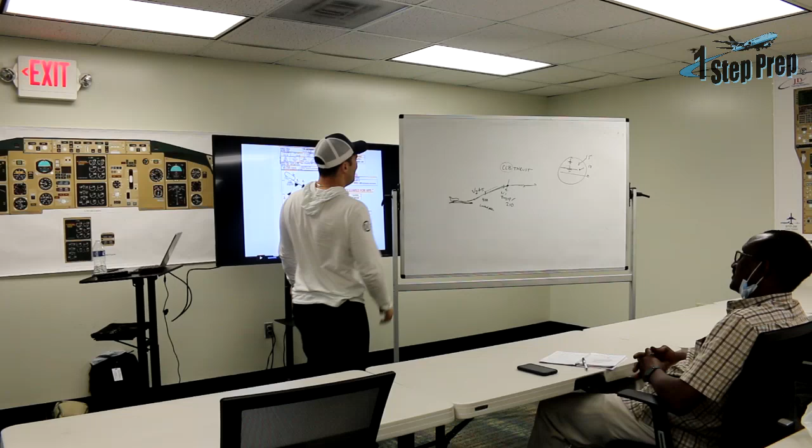Before departures, when you line up, ready for departure, parking brakes released. You move the throttle all the way to the takeoff detent. It has a takeoff detent, so I go to the takeoff detent.

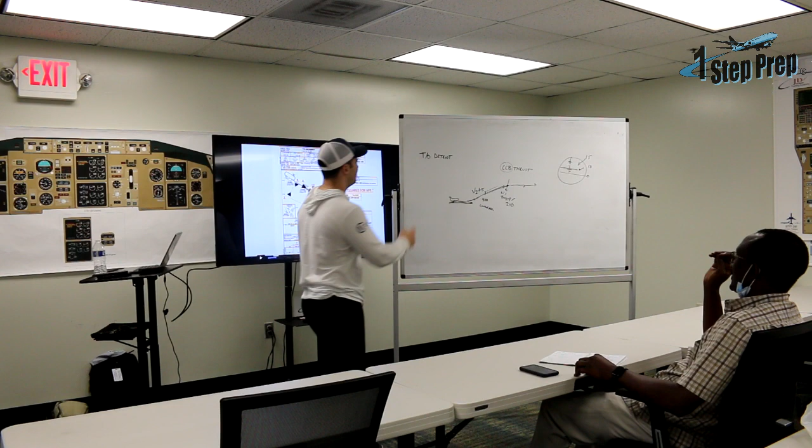And you have the climb detent. I want to list the three of you. Yeah, you can write it. Takeoff, climb, climb detent, and the cruise. All will be annunciated on the PFD. These are thrust settings. That's correct, always annunciated.

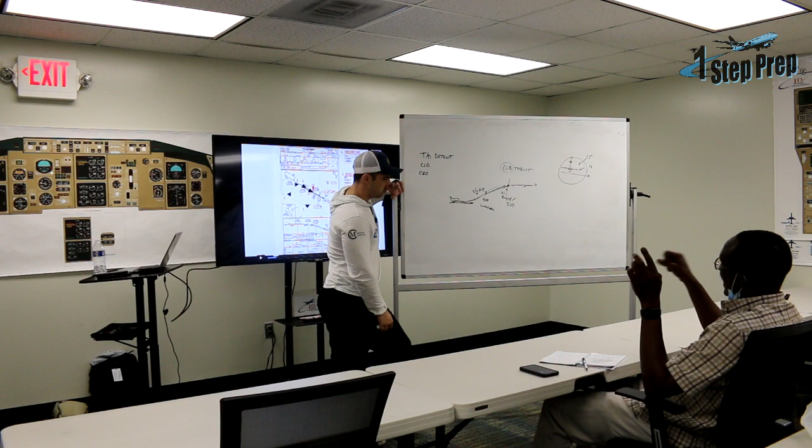So at 400 feet, you select heading or nav or whatever. At 400 feet, you select heading. At 1,000 feet, flight level change and bring back the thrust to climb detent to avoid the 5 minutes.

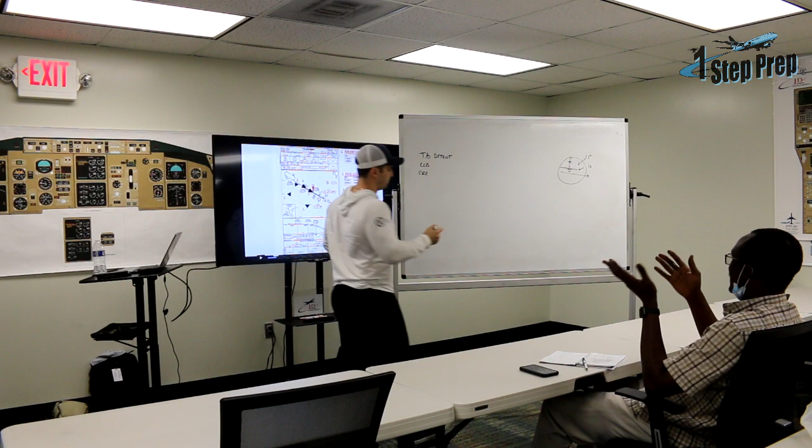So you now return to the climb detent and continue your climb. So the 737 profile is no different. It's the same, same profile. The only difference is here the aircraft selects the climb speed and whatever for you.

The thrust. In the 737, you have to select 210. Yes, so let's look at it, right? Here I am now, here you are, okay? You're on the runway and you're about to take off.

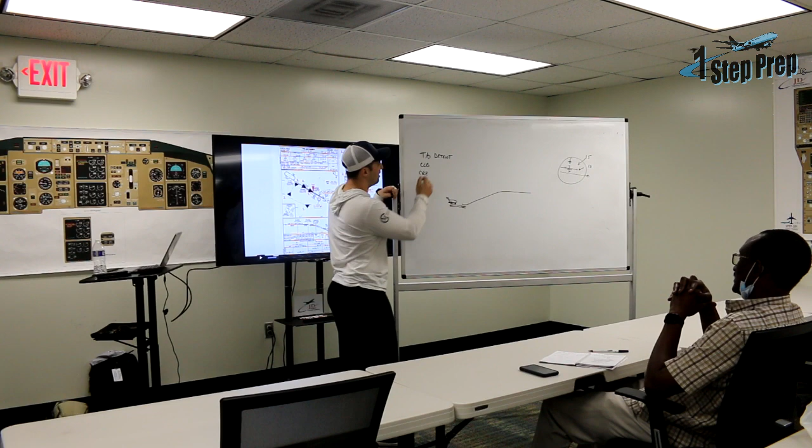So the first thing we do, we advance the thrust levers to 40%, stable, and we select TOGA. Now, TOGA, when you push it, what kind of thrust did I get? Takeoff thrust. Okay, so in the Citation, you went to the takeoff detent to get takeoff thrust.

In the 737, I push TOGA to get takeoff thrust. It's the same thing. It doesn't matter if it's a detent or a button. What's important to you is give me takeoff thrust. Correct? Okay, so we rotate off. V1, rotate, positive rate, gear up.

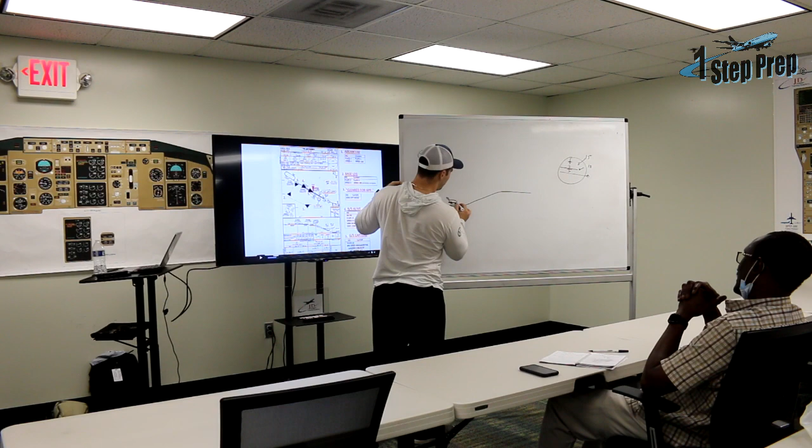You said at 400 feet, what do you guys select? Select heading or the lateral mode. Okay, what do you think we do in the 737 at 400 feet? Same thing, right? 400 feet, heading select. Lateral mode, heading select. Correct, yes, the same thing.

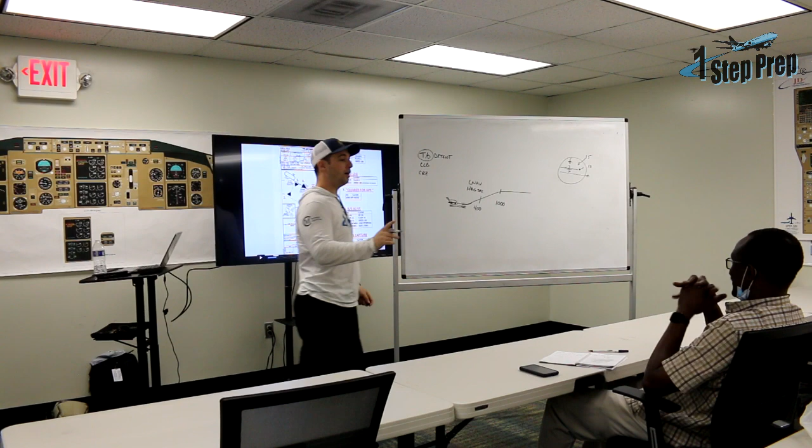Nothing's changed. Okay, let's get to 1,000 feet. Flight level change, okay now, or VNAV. Hang on a second, what did you say you do in the Citation at 1,000 feet? Flight level change, at 1,000 feet.

Yes. Okay, and do you do anything with the thrust levers, or do you leave them alone where they are? At 1,000 feet? No, do you have to reduce? Yeah, you have to reduce because you don't cross 200 knots with your flaps at 15. But what do you do for the thrust? You probably leave it there and push flight level change?

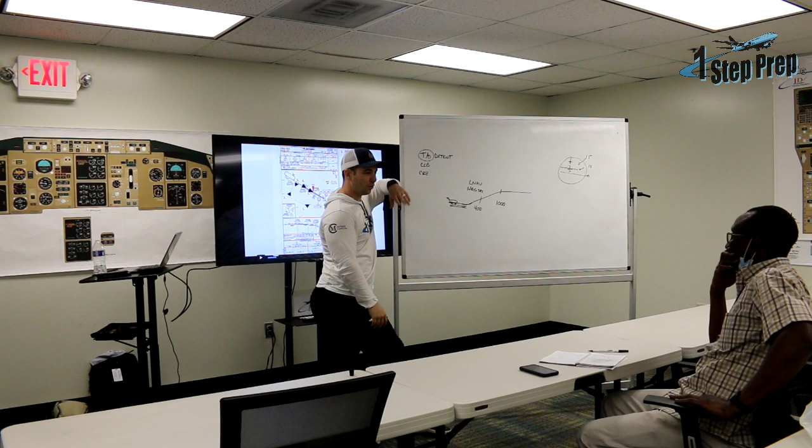Flight level change, yes. When you push flight level change, I can almost guarantee your thrust reduces. Correct, right? Okay, you know why? Because level change works the same in the citation, works the same in the 737, works the same in an A320.

Okay, let me tell you how it works. When you select level change, it gives me climb thrust, if I'm climbing. And if you're descending and you push level change, what happens? It will descend and the speed will run away. Okay, and what happens to your, well, you don't have auto throttle, you have to reduce it.

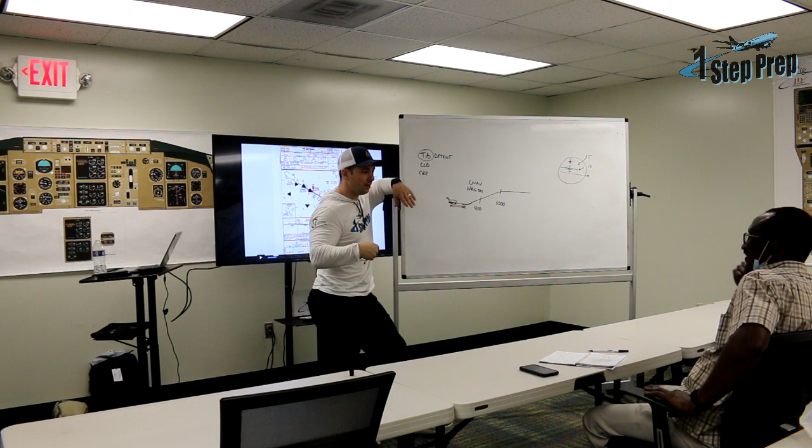Yes, so if you did have auto throttle, what would it do? It would reduce it and hold that speed. Okay, so the beauty of the 737 is it has an auto throttle and it'll reduce it for you. Yes, sir. So now at 1,000 feet, flight level change. In a citation, you push flight level change. Really, what you're trying to do is not just push flight level change.

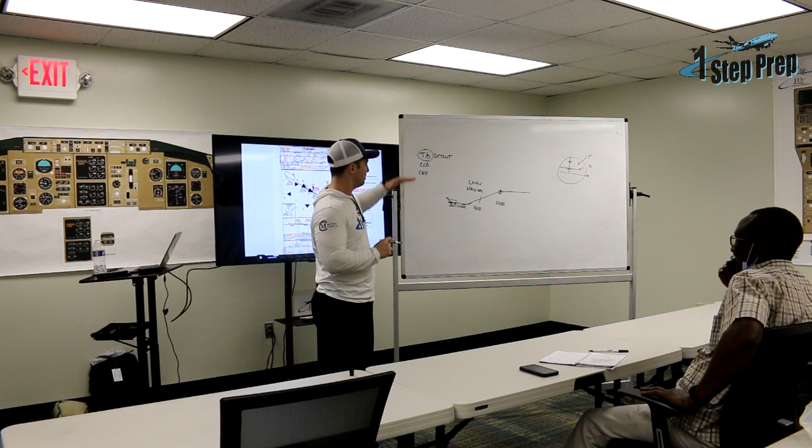You're trying to get climb thrust. Okay, you understand what I'm saying? Yes, I do. Okay, so now let's go to the 737.

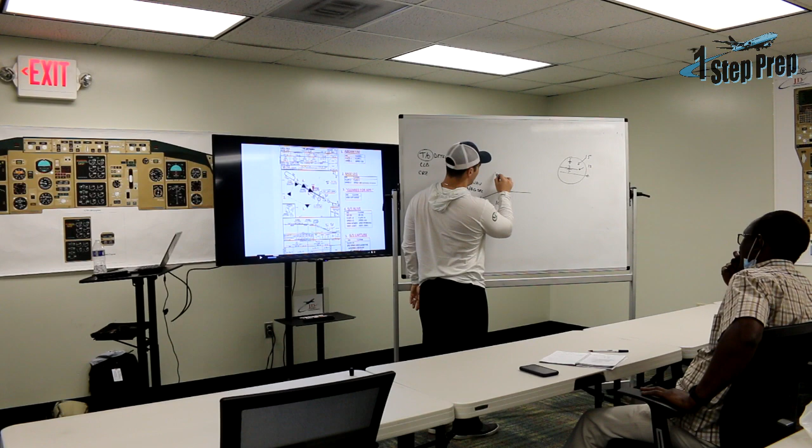At 1,000 feet, what do we usually say? N1, 210, and then we accelerate the speed to 210. Okay, what is N1 really doing? When you push N1, what is it doing? It goes to climb thrust. It gives me climb thrust. Reads from the MCP.

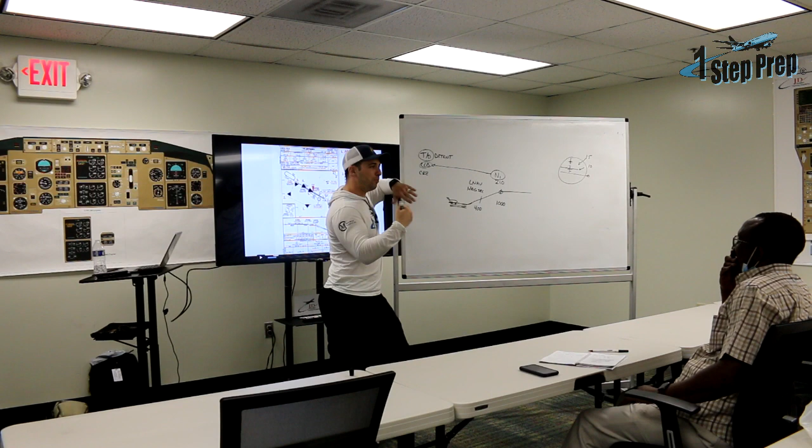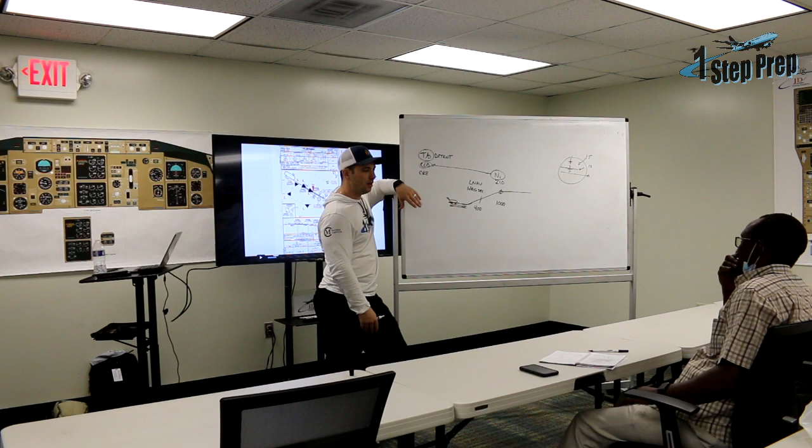You're from the Citation, so I guess what I'm getting at is, just to relate it across to what you're used to, you're not doing anything different. You're just pushing a different button or saying something different, but the profile is the same. I want you to understand that, because I think you'll better relate it to what you're doing here. So at 1,000 feet...

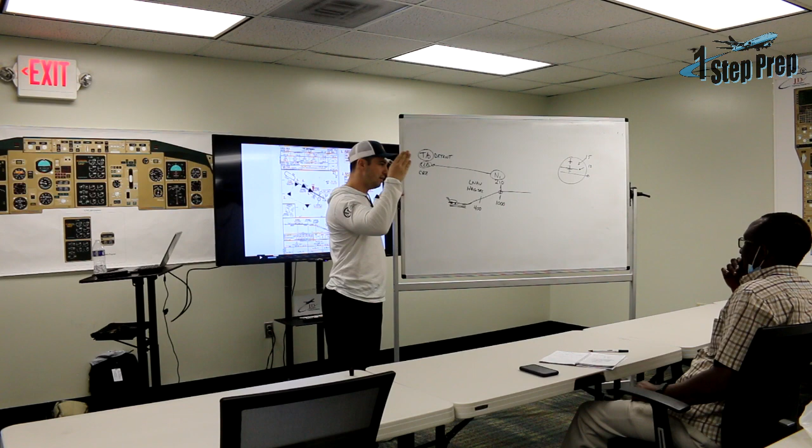N1 really means give me climb thrust. Level change in your world really means the same thing. So just think, okay, at 1,000 feet, I'm pushing N1 - I'm calling for it, you're not really going to push it, you're going to call for it, right? But you're calling for it because what you're really saying is, hey pilot monitoring, give me climb thrust. It's that simple. So the thrust levers come back because you have an auto throttle, and you roll the speed up, right?

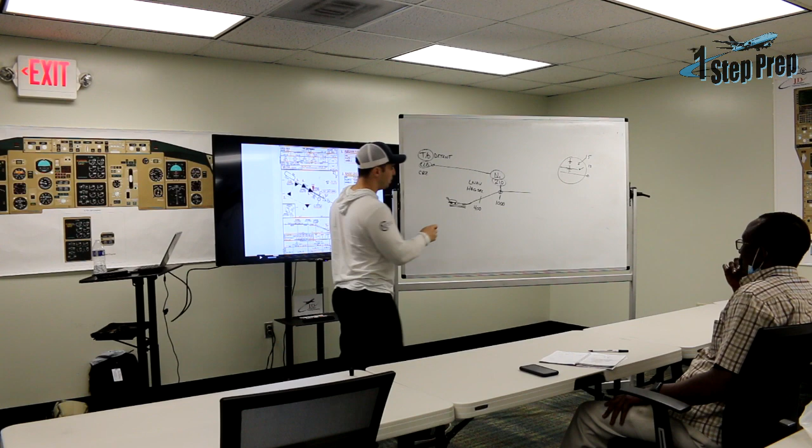Now you roll the speed up to 210. Okay, now why do you roll the speed up to 210? Because now we're going to begin accelerating, right? Because when we took off, what speed did we have set? It's from V2 - we had V2, V1, VR, then V2. And in the MCP specifically, you had V2, which is usually like 142, 140 something, right?

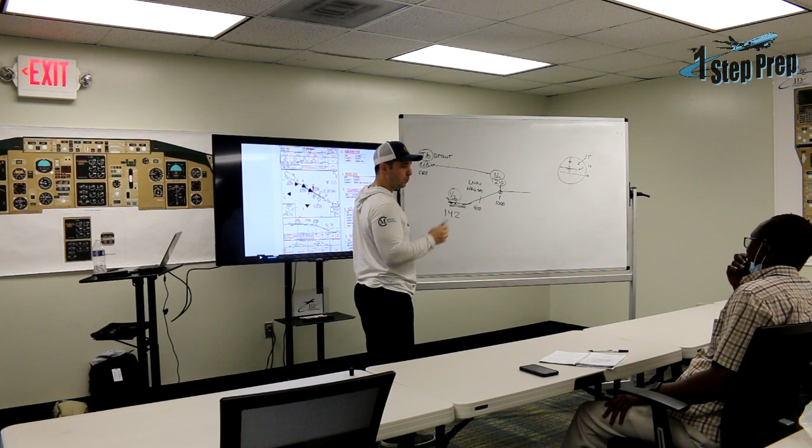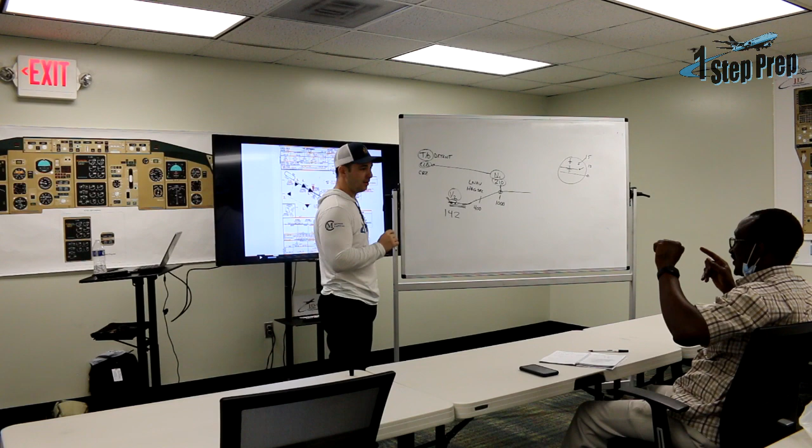Do you know, when you get to V2 and you get to 1,000 feet and press flight level change, whatever speed is there will capture. You're talking about the Citation? Yes. I guess it will capture. Yeah, you have to now dial up. What do you dial it up to? Something faster than what you're at.

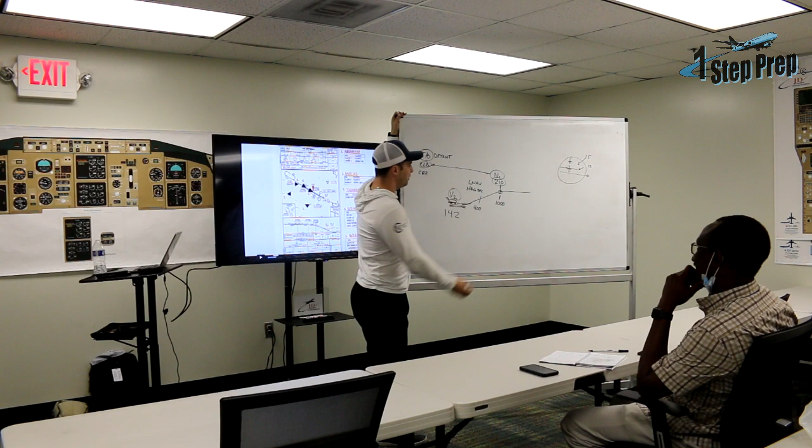You dial it up to anything you want, but make sure the flaps are up before 200 knots. So you're probably going to set it to something at least 200 plus knots. Correct, right? Yeah, so you can retract the flaps. So what are we doing here? We're setting 210, accelerating. It's no different, man - it's the same thing, right? It's the same thing.

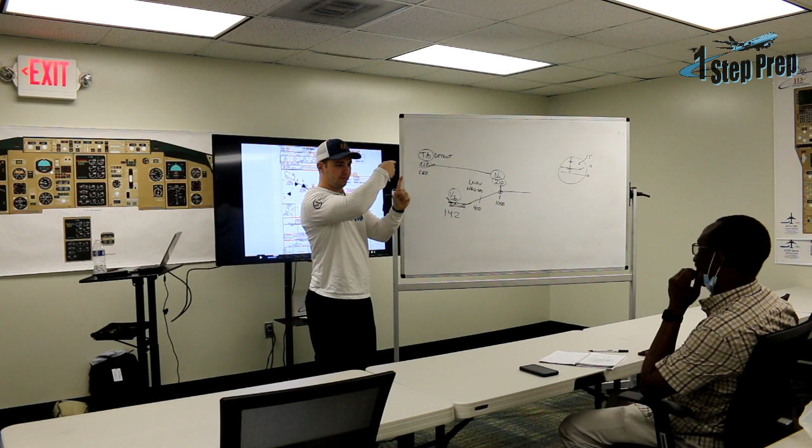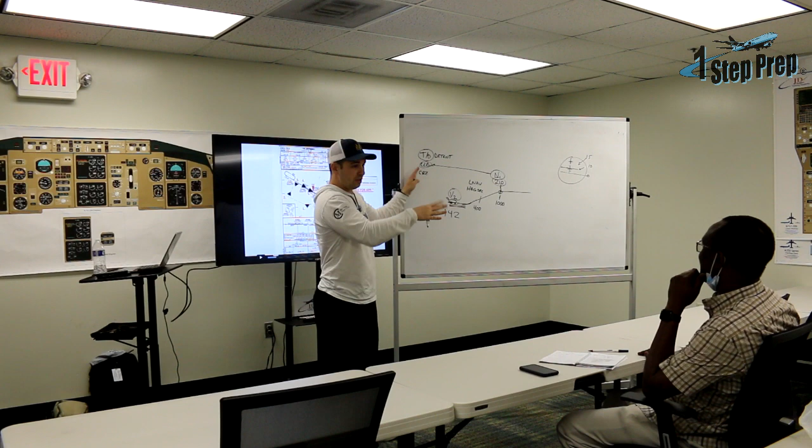So look, you get to 1,000 feet. When you set N1, we got climb thrust. When you accelerate to 210, the flight director goes down so that we can begin accelerating forward, because the thrust is fixed now - the thrust is at climb thrust, it's not moving anywhere. So the only way for me to control my speed is to pitch down. Yeah, it's the only way, so I pitch down, right? This is what I was drawing over here, 10 degrees.

You begin accelerating, and then we begin the flap retraction. I got it now. Okay, flaps up, no lights, after takeoff checklist, that's around 210. Okay, now let's talk about the retraction for a second.

The flap retraction, right? So you're in the classic - they have analog, and they also have the speed tape, because it's partial EFIS, right? Okay, so if you're climbing at, let's say about 150-ish, and you took off with flaps 5, as you begin accelerating forward, your speed here - once you get to about 170 with a positive trend, you're going to go from flaps 5 to flaps 1, right?

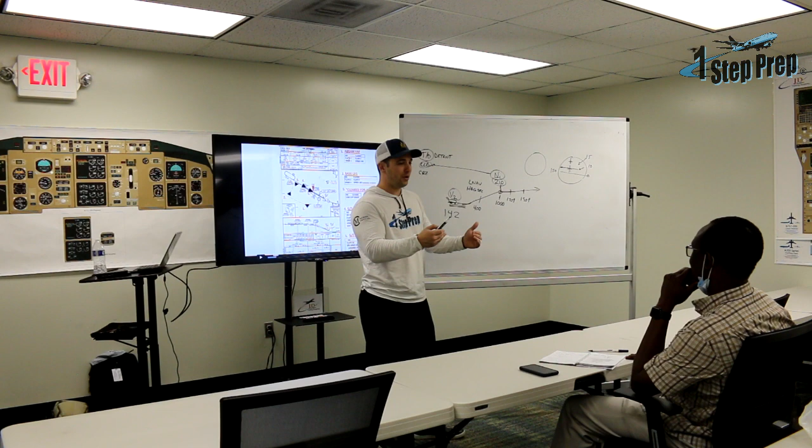Then once you get to 190 with a positive trend - always with a positive trend, what does that mean? You have the arrow on the speed tape, yeah, you're speeding up, right? Because if I'm slowing down, the last thing I want to do is make the wing smaller - I need a bigger wing to fly slower, right? So I don't want to retract the flaps, I have to be accelerating. So if I'm accelerating, 190 with a positive trend, then we go flaps up.

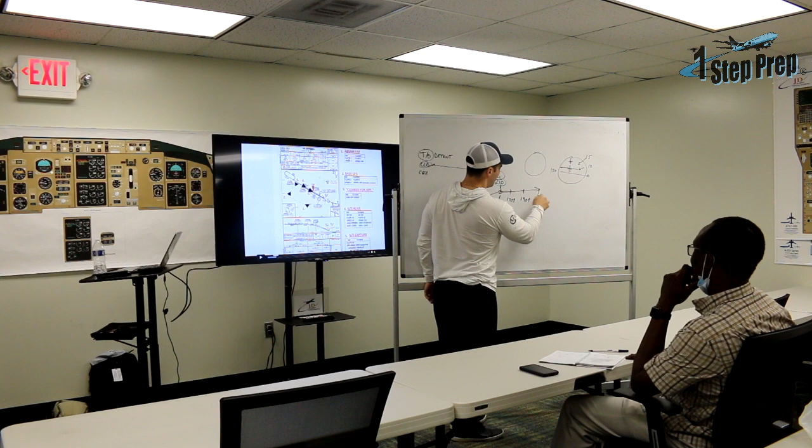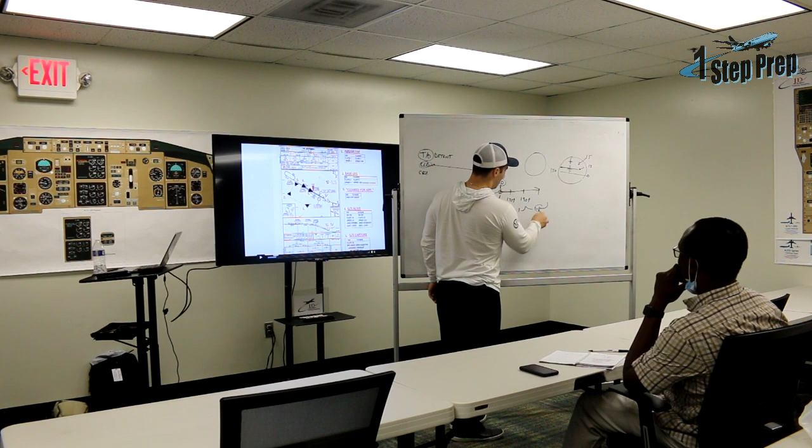So from here, you were flaps 5, and from 5 you called for flaps 1. Now we're at flaps 1, and from flaps 1 we called for up, and you end up clean at speed 210. It's now up to you to accelerate or to hold it there.

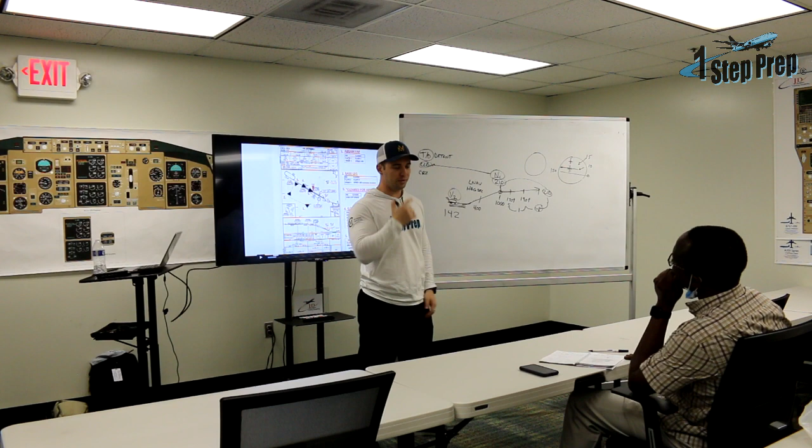Now you set 250, or you can go VNAV, and VNAV will accelerate you below 10,000. Right? Make sense?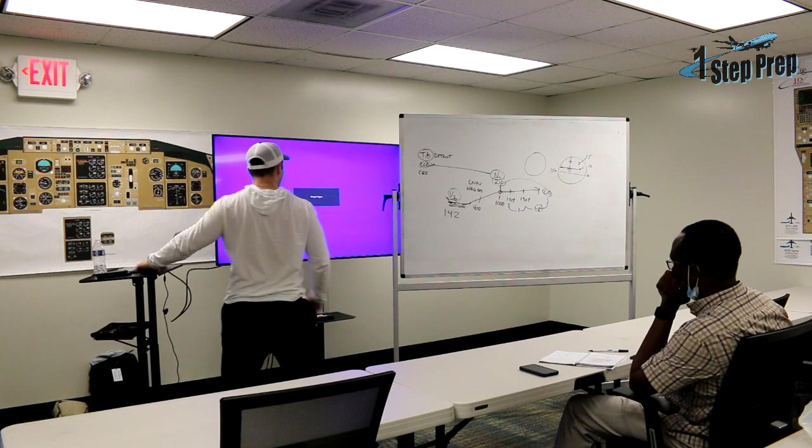Okay good, so that's the takeoff profile. The callouts you want are these right here. 400 feet, you're familiar with because that's your background. 1,000 feet, N1, 210. Or I think if they have you say bug up, it's the same thing, right? Bug up, 210. N1 bug up, N1 210. Okay, either one. And then we do the flap retraction.

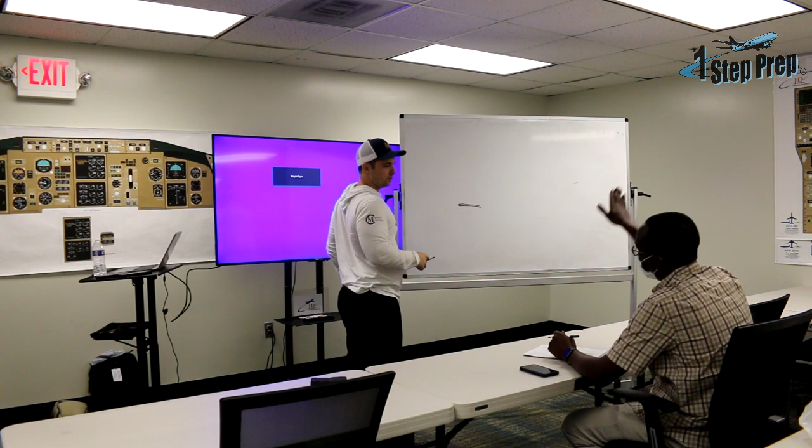This is the normal one for the takeoff, 2 engines, and the approach, 2 engines. Now the single engine. You're talking about the V1 cut, right? Right, and then, not the V1 cut. The go around, the single engine go around and single engine approach.

Let's look for a second at the go-around, and then I'll bring you back to that, because right now let's assume we're still normal 2 engines. So we did the takeoff profile right here. Now we're doing the go-around profile. All right, so you're on the approach, and you end up having to go around for whatever reason.

Your call out is going to be go around, with 2 engines. Correct, yeah, even with 1 engine you're going to say go around, right? But go around. Okay, set go around thrust, flaps 15. Okay wait, go around, flaps 15. Yep, positive rate, gear up.

Positive rate. Normal takeoff, right? You're up. It's the same thing.

You write sideways like that? Yeah, wow, that's how I get it. And you write straight, yes, but you're writing sideways. Even if there's no line, I'll write. Get out of town, man. What else can you do? Holy crap, and can you write left? And you're left-handed, yes. You're writing left-handed sideways, yes. What? Get out of here man. Can you spin this eraser around on your finger or something? Okay, all right, I don't know, you're full of tricks here.

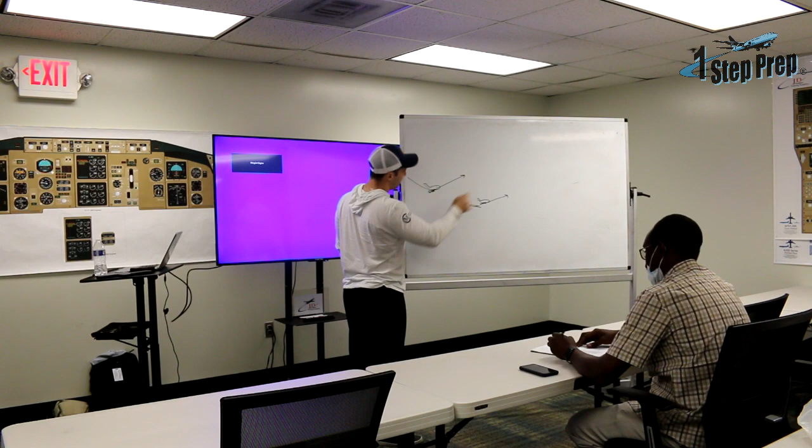Okay so look, go around flaps 15, that's assuming your flaps 30, right? 2 engines, so you're gonna go around with flaps 15. Go around flaps 15. Positive rate gear up. 400 feet.

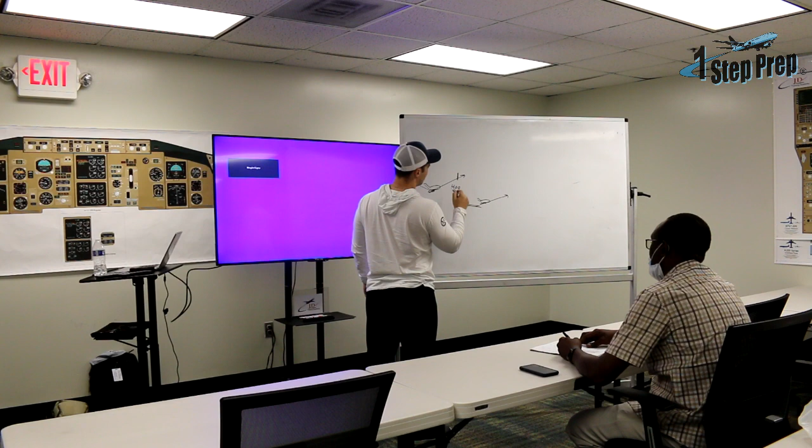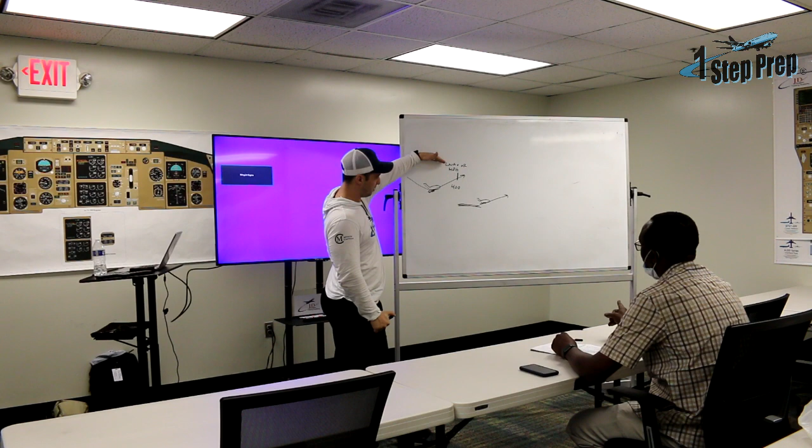What do you think you're gonna say? N1 or? No, not N1. LNAV or heading select? Okay, LNAV or heading, which one? If you're following the published missed, if published missed is LNAV, right? If I'm going extended center line, it's heading select, or any heading they give you. Yeah, if they give you a heading, go to heading, right?

Okay good, now 1,000 feet. How about that? This is where I had problem with him today. Yeah, this is where everybody has problems. This isn't where you have problems, this is where every 737 pilot has problems. Okay, 2 engine go around.

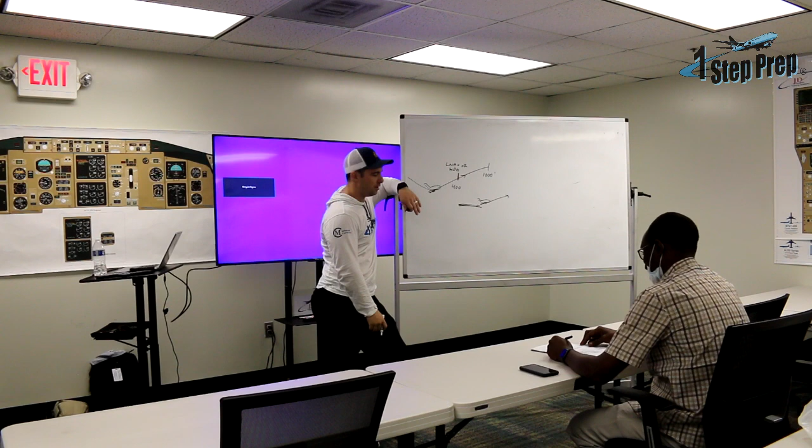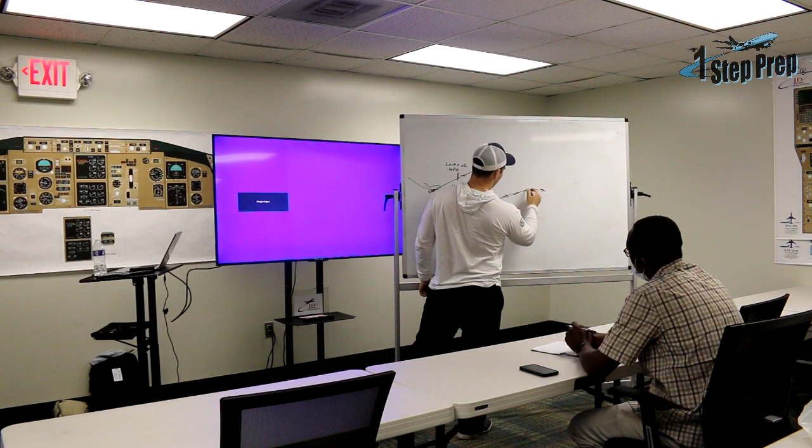Because the reason they have issue is they're not quite understanding the thrust modes needed for the different phases of flight. Okay so watch, let's go back to the takeoff for a second. Takeoff thrust, takeoff thrust, takeoff thrust, all throughout, right? What is takeoff thrust approximately in N1? 98%, 99%? Thereabouts, okay so let's say it's 99%, right? You get to 1,000 feet and we push N1, which we said N1 really wants to do what? Give us climb thrust. Yes, so up to this point we're riding with 99%. Then over here, we go to climb thrust, and climb thrust is gonna give us 210.

Well, we're gonna accelerate to 210, but from a thrust standpoint, it's gonna be a reduction, right? So 99 is gonna go down to say, whatever, 97, 96. Yeah, let's say 95, okay? So now I'm at 95%.

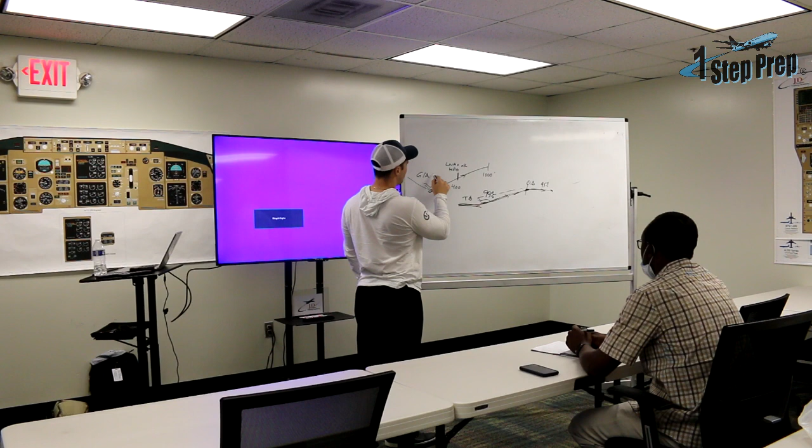So I have a lot of thrust, and then I have lesser thrust. The go-around thrust setting is less than the takeoff thrust setting. So to give it a number, let's just say it's maybe 90%. These are all ballpark, arbitrary numbers, right? Let's say it's 90%.

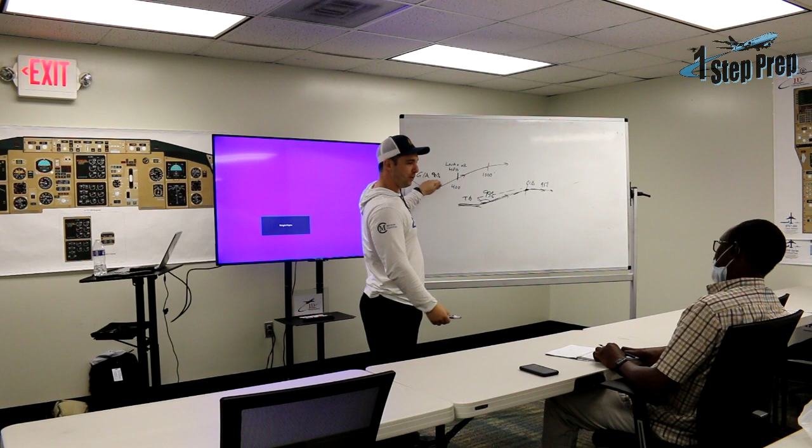So when I get to 1,000 feet, where am I reducing thrust to? Nowhere, it's already reduced. Right? Correct. So this is what causes confusion because we take off a lot, but we don't go around a lot, which means our takeoff and climb-out phases happen all the time.

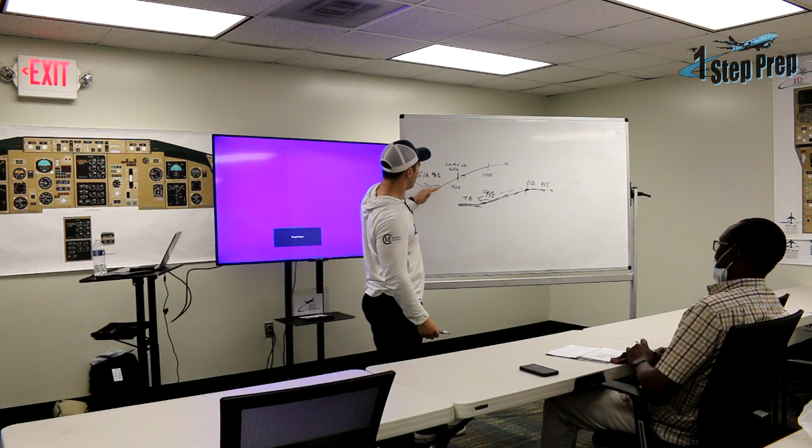We do these all the time. We always have takeoff thrust, we always have climb thrust. And the profile is very similar here, almost paralleling, right? But the difference is the thrust setting is different. This is a go-around thrust setting, which doesn't require a thrust reduction here.

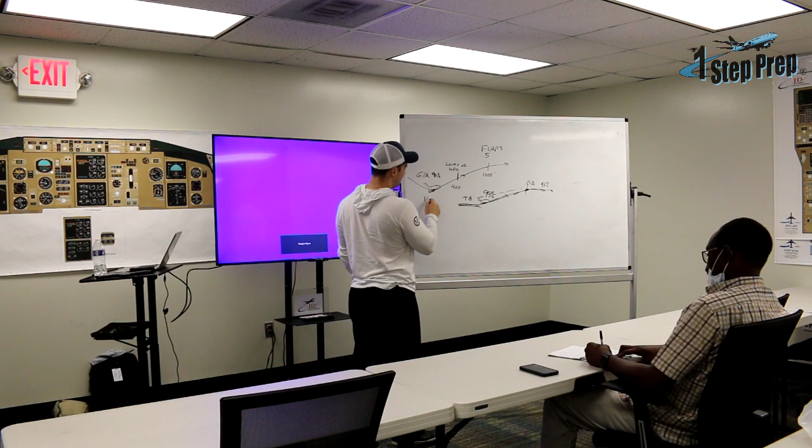So when you get to 1,000 feet, the only thing you're going to call for is flaps 5. From flaps 15, which was back here, we go to flaps 5. So on a go-around, at 1,000, all you say is flaps 5, that's it.

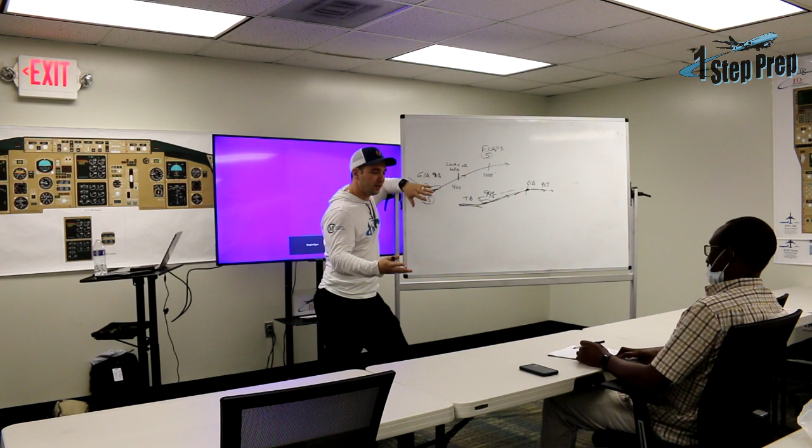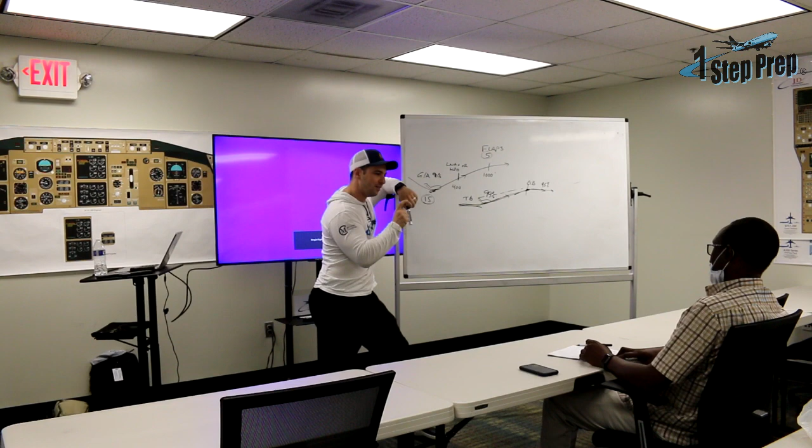And you see what happens now when you say flaps 5 is that the airplane realizes — well, it realized from the time you hit TOGA in the air, weight off wheels, TOGA, I'm in the go-around mode, it knows. When you begin the flap retraction, what you'll notice is the speed will begin to increase, accelerate by itself.

Over here, you had to set speed to 210. But here, the flap retraction will begin accelerating you automatically. I understand, okay. Make sense? So the difference between this and this now is at 1,000, flaps 5.

While this one, at 1,000, N1 bug up, 210. And why do you push N1? What is it really doing? Climb thrust. And when you set speed to 210, the flight director bar comes down and I'm accelerating, right? So here, how come I don't have to push N1?

Because it's already sensed that he's in flight, he's in a go-around. And the acceleration happens not when you set 210 — we don't set 210 — the acceleration happens when we do the flaps. The speed window will be blank. This is what throws everybody off. They try to set speed 210 and then they realize there's nothing to set.

Yes, there's nothing there. Same thing happened today. Of course it did — it didn't happen just to you, it happens to everybody. Okay, right? This is what happens. I'm confident now. Yeah, good. You gotta know what it's doing.

If you look up there and say, oh man, the window's blank — that should remind you that's flap retraction. If you look up there and see nothing, say flaps 5. When you go into the sim next time, you're gonna look up in the window and you're gonna see nothing, right? And what are you gonna say? Flaps 5.

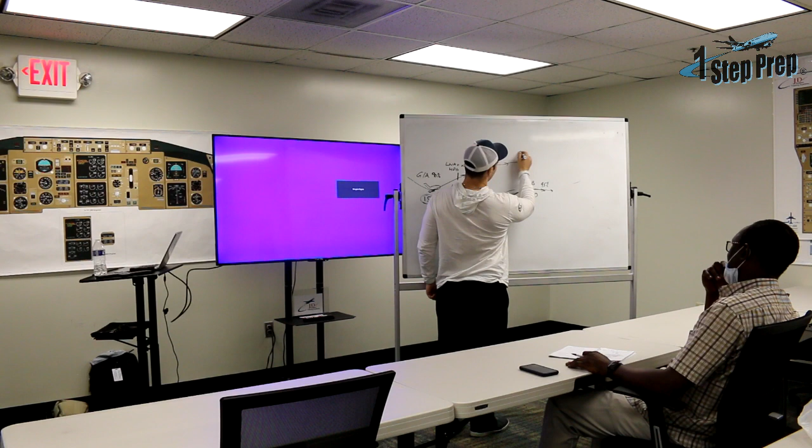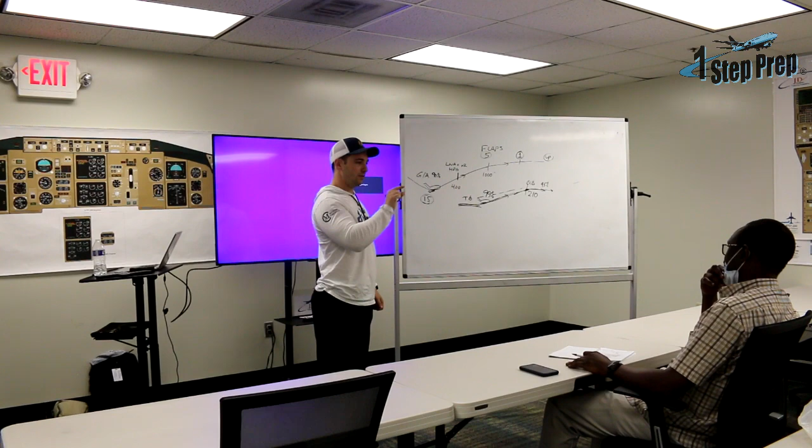Okay, so flaps 5, you're gonna begin accelerating, and then the next thing you're gonna do is say flaps 1. And then eventually you're gonna say flaps up. And by then the speed will have reached 210 automatically. It is possible for that window to repopulate with the speed.

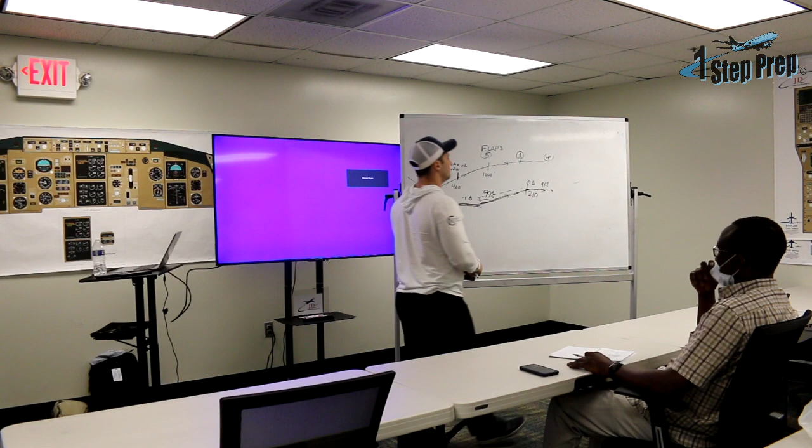When? When you get altitude acquired — it happened today. I need to capture that speed that you have at that time. See?

Okay, when do you get altitude acquired? When you have altitude acquired, the MCP speed window opens, right? It opens. So now the question is, okay, if altitude acquire opens the speed window, when do I get altitude acquire? Well, what is altitude acquire?

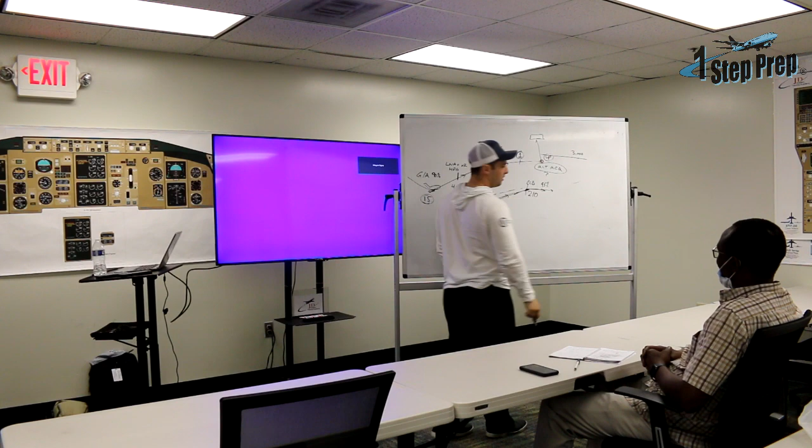The 3,000 you set on the missed approach. Okay, let's break this down for a second. Altitude acquire means that we are, let's reverse it, acquiring the altitude. That's it, right? I'm acquiring an altitude. That means I'm reaching it.

So what we don't want to do is get to 3,000 feet and then stop. Because what happens if you're in your citation and you get to 3,000 feet and you're like, oh, there's 3,000 feet, and you push? What do you feel in the airplane? Bad, it doesn't feel good, right? Yes, because you're going to feel negative G's.

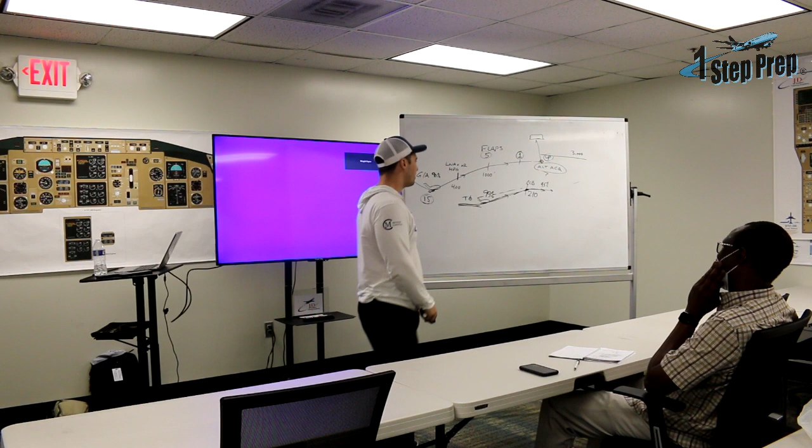Okay, so what we don't want is negative G's. So what does that mean for altitude acquired? Since altitude acquired doesn't want negative G's, it's trying to do everything at 1G. 1G is what you're feeling right now.

How you feel right now? Yeah, good. You're feeling good, brother. That's because you got 1G right now. And I want to have 1G for my check ride. Yeah, we don't want any G's, man.

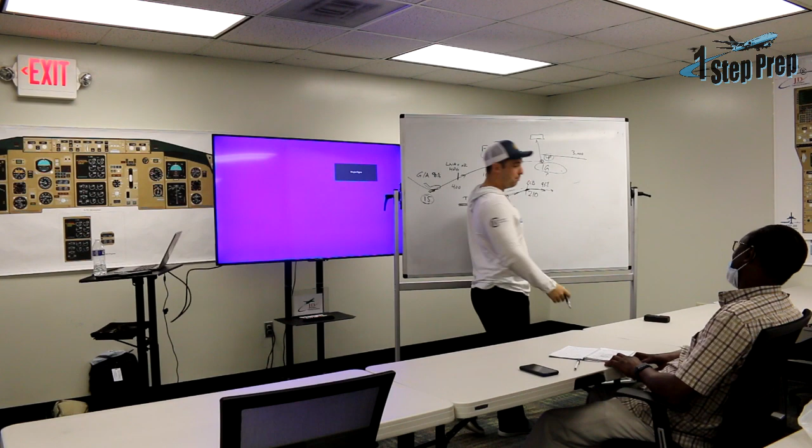Okay, so altitude acquired kicks in when it's the appropriate time to begin leveling off to maintain 1G. It will then become altitude hold. And then altitude hold comes in.

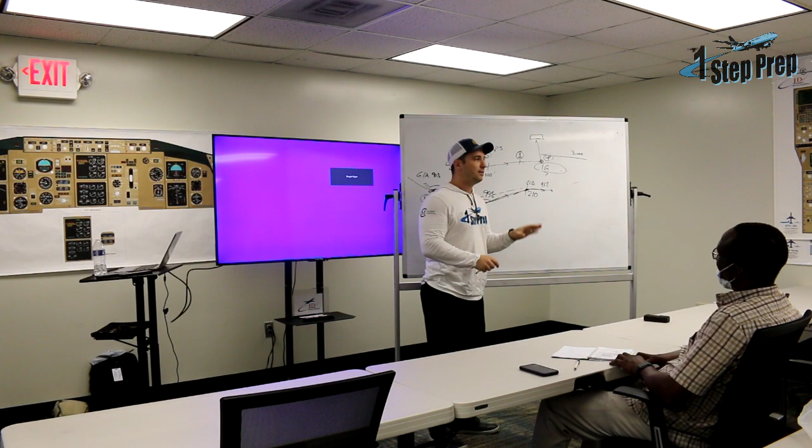Now remember, how do I maintain 1G? Well, it depends how quickly I'm climbing. If I'm climbing 2,000 feet a minute versus climbing 200 feet a minute, it depends. How fast am I climbing? How aggressive? So the airplane knows, based on inertia and rate of climb, this is where I need to begin acquiring to maintain that smooth 1G level off, right?

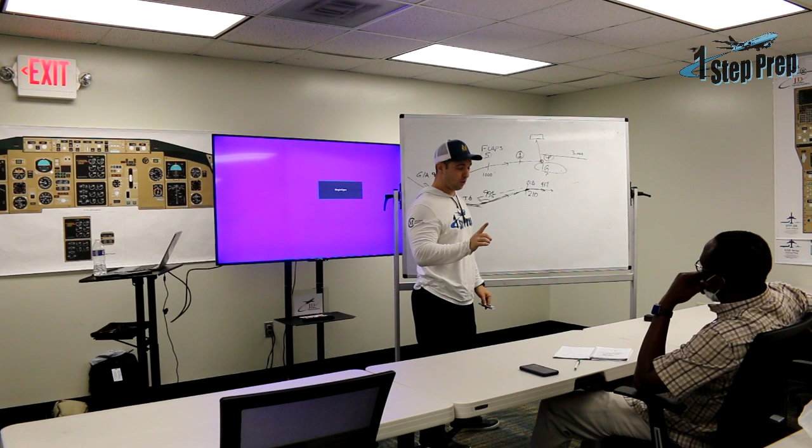So what altitude acquire should mean to you is 1G path to level off. Make sense? Altitude acquire equals 1G level off path. What does altitude acquire equal? 1G equal flight path, 1G level off path.

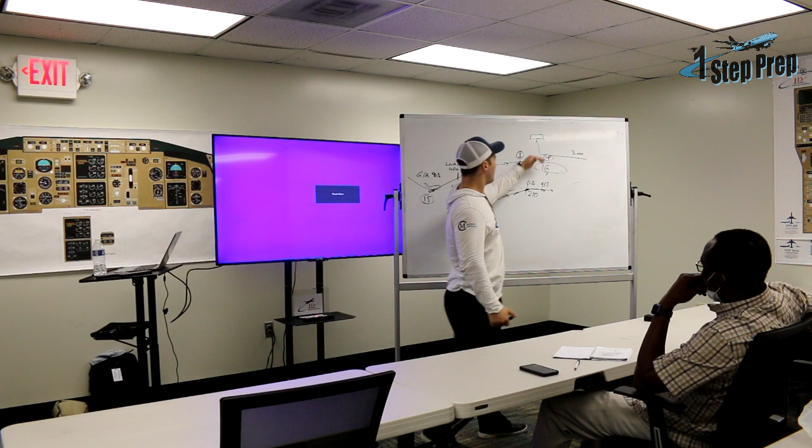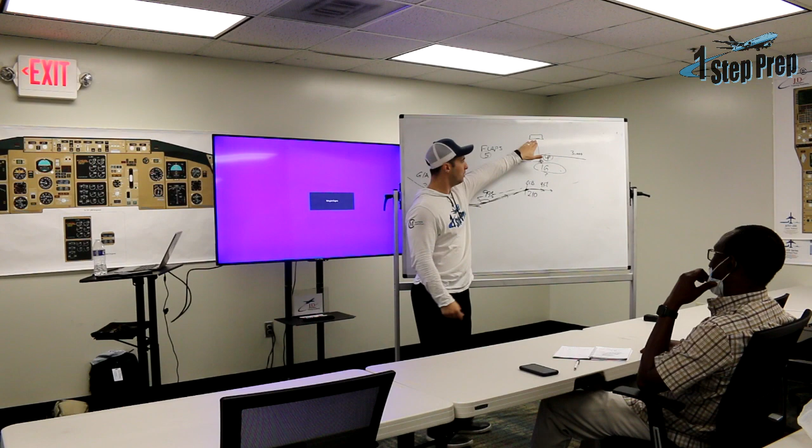Okay, so now here we are at 3,000 feet, and when you got altitude acquire, the window reopened at altitude captured or hold, at a speed. Let me be more specific. When you got altitude acquire, the speed in the MCP speed window is whatever speed you have. So if you had flaps 1, speed 190, and then altitude acquire comes in and the window opens, it's 190.

Right, so now the thing to realize is, let's say your go-around altitude is not 3,000, let's say it's 2,000, lower. You get to 1,000 feet, and you say flaps 5. Then all of a sudden, right here, altitude acquired.

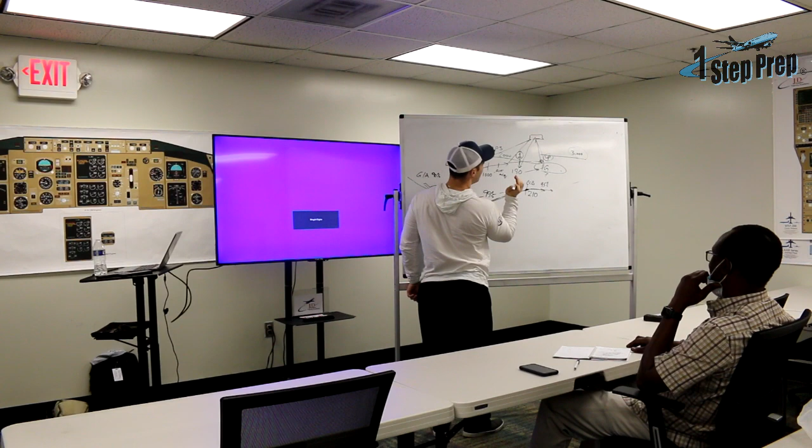Okay, the speed window reopens at what speed? 210, at whatever speed it is, which is probably around the flap 5 speed, 150, or 160, 170. So now you have to be mindful of roll the speed up.

So on a go around, altitude acquire should mean for you, check the speed, because now it's open again. It's not controlling anything automatically, right? This is all with 2 engines.

This is a lot of lines on the board. This is a good one. Does this make sense? Yes, absolutely.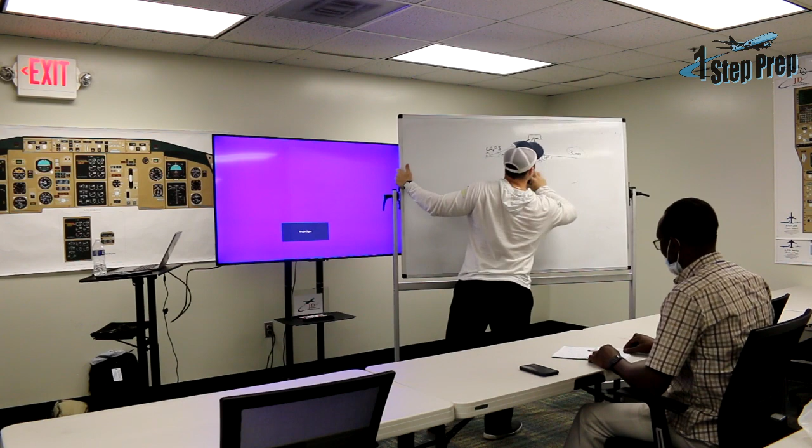Now let me ask you, brother, what flight academy would give you this training and buy you lunch and pick you up? One Step Prep. Come on, man, red carpet service, baby. We're gonna have some fun with this. It's serious prep stuff, but it's enjoyable, right? One Step Prep, it's gonna go in.

Okay, so single engine. Let's do single engine and then we'll take a break. Good, yeah? Go ahead.